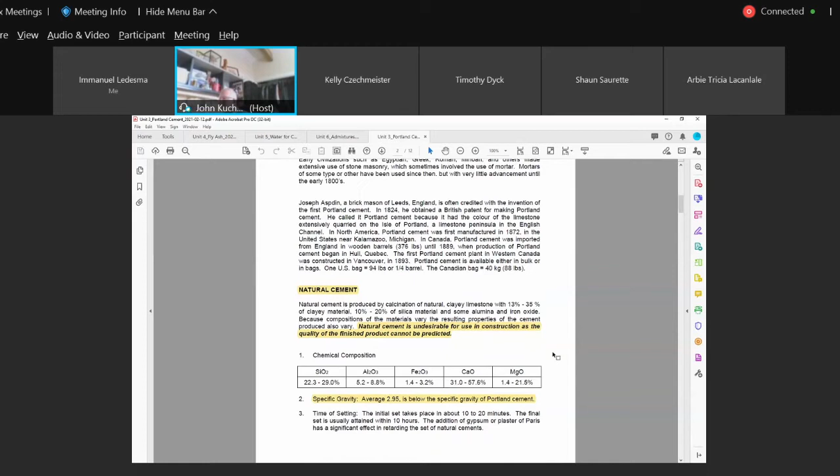It's unpredictable, okay? You can see the specific gravity of it is quite a bit less. We're at 3.15, it's about 2.95. The final set is usually attained within 10 hours. Ours can be around that also. We can start cutting concrete pavements with the GU cements anywhere between 5.5 to 6 hours, which means it's not final set, but it's setting up enough to support weight. But the initial setting time, 10 to 20 minutes, that's fast. You're going to lose your plasticity. You're going to lose your workability. So again, natural cements are not ideal.

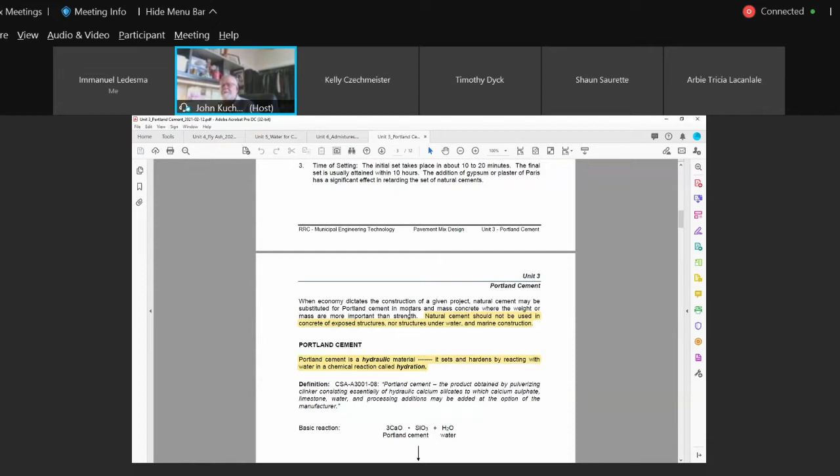Again, natural cement should not be used in structures exposed to water, marine environments; it's not as resistant to salt attack as our normal Portlands, because we can manufacture and change the composition of ingredients in various cements. That's why we're going to have 6 types of cement. In Canada, we have 6 various types. By changing raw materials, we can change the composition of the cement, make one more resistant to sulfate attack, make one with less heat of hydration, in other words, not producing as much heat.

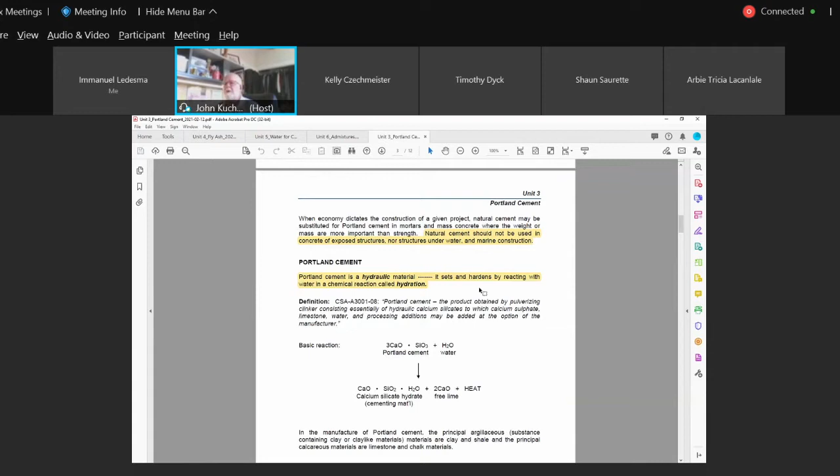Okay? Portland cement is hydraulic. What that means is it reacts with the water. And when it reacts with the water, we undergo a chemical reaction, and that chemical reaction is called hydration. Very common term on quizzes, very common term on exams. The chemical reaction between the cement and water is called hydration. That chemical reaction creates a hardening process. That's why concrete sets up. Here again is the chemical reaction of it. I don't quiz you on it.

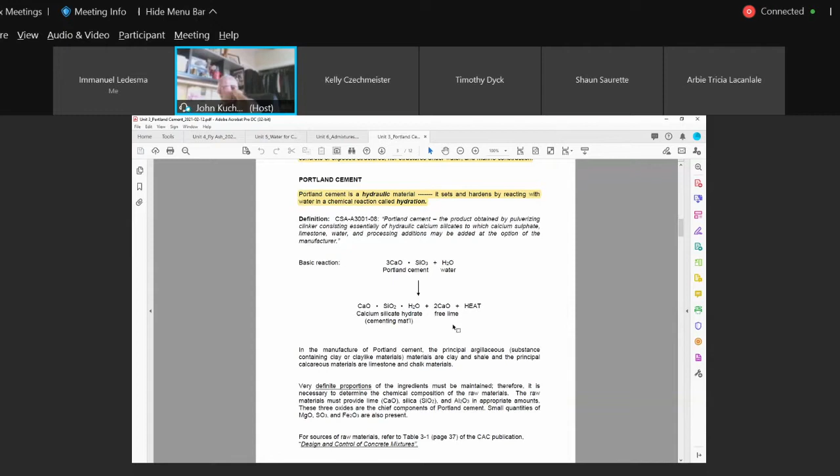I don't want to really know myself other than the basics. But my chemistry goes back to grade 12, so I might have forgotten a couple of things. Okay. Very definite proportions are maintained for the various types. So if we're going to make 6 different types of cement, we're going to change the proportions of the ingredients. Now, cement is manufactured from raw materials, so we have to find the raw materials that we need

to produce this design and control of concrete mixtures. If you guys are going to be working for some of the consultants, they may even have this in their library. This is the textbook that we would have been using this year. Chapter 9 came from an older version from the Portland Cement Association. We were using one that was donated by the Concrete Ready Mix. It's the 8th edition, the Canadian edition, by the Cement Association of Canada.

So in there, there's a real good unit on cement and manufacturing, raw materials, where to find them, and so forth. If you get a chance to get a copy of that manual, by all means, take a good look at it. Okay, we're going to look at the key. These are the natural cements and Portland cements. Again, this is just for your interest. I'm not going to quiz you on it, but it gives you the raw materials, basically where Portland cement gets them.

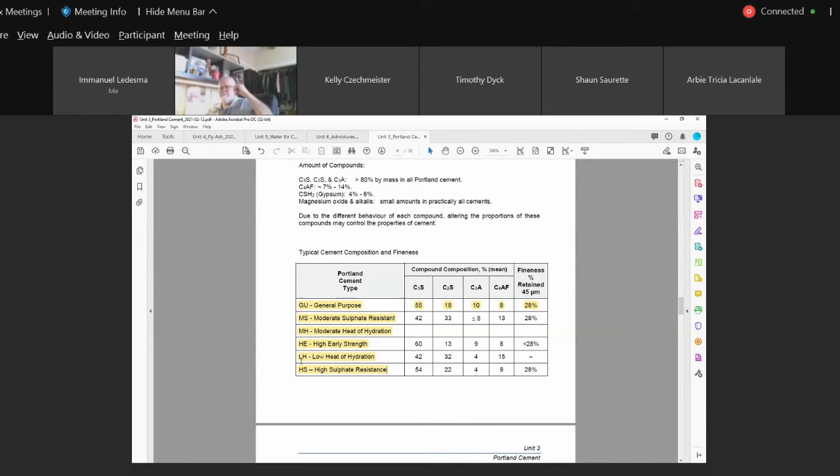GU, general purpose, is basically our Portland cements: anything above grade, pavement, slabs, anything above exposure to sulfates. You'll read in the City of Winnipeg where they talk about an early open pavement mix. They used to sometimes refer to it as a high early. They don't use high early cement. If you want to get a quicker strength, in other words, you're going to pour a slab downtown Winnipeg on a Friday and you want to open it Monday to traffic, you're going to use what they call a high early strength concrete mix.

And what they do there is they just use general Portland, GU, but they increase the cement content. So instead of, say, using 340, they may use 380 or 400 kilograms of cement. So they're making a stronger concrete mix, not because they need it for loading or capacity of cars. They just need it to get that 20 MPa quicker. They can open pavements in the City of Winnipeg if they get 20 MPa. So if it typically would take you a week to get 20 MPa, now they can get it in about 3 days. They just boost up the cement content.

Low heat of hydration is what you would probably use at the big hydro dams, where you have mass concrete, okay? Because the heat of hydration is what is generated from the hydration process. When cement and water come together in a chemical reaction, it's called hydration, and with that it generates heat. At one time there was a myth, and there still is with some contractors: oh, I don't have to heat concrete, it'll never freeze because it creates its own heat. Balderdash. Try and place concrete at -5 without any type of protection and see if it doesn't freeze. It'll freeze. Yes, there's heat generation, but not enough to prevent it from freezing.

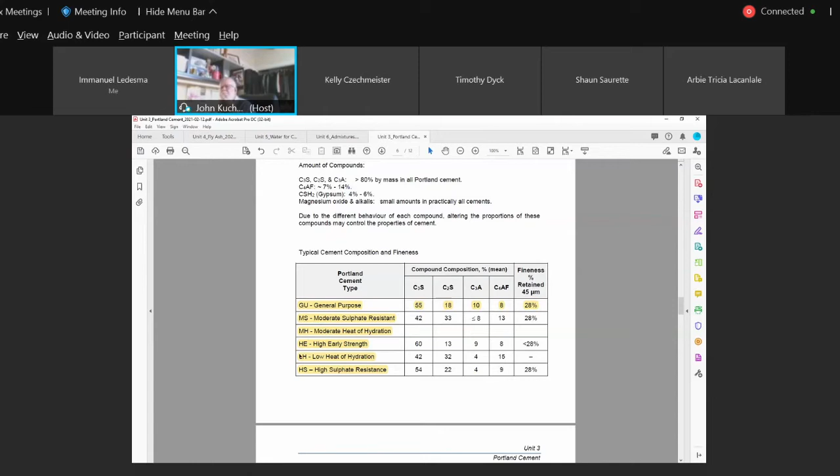Now, when you've got mass concrete, large sections, maybe a big pile cap, maybe a big housekeeping pad for a huge generator or a huge compressor, you may be looking at something that's 3 meters by 3 meters by 3 meters. The temperature inside the core of that element is huge. That's bigger than your room; the ceiling height is only 8 feet. So you can imagine the amount of heat buildup inside that big concrete pedestal or block, okay? So we've been able to produce various cements for our various environments. GU, MS, and so on, because remember these used to be type 10, type 20, type 30, type 40, type 50, okay?

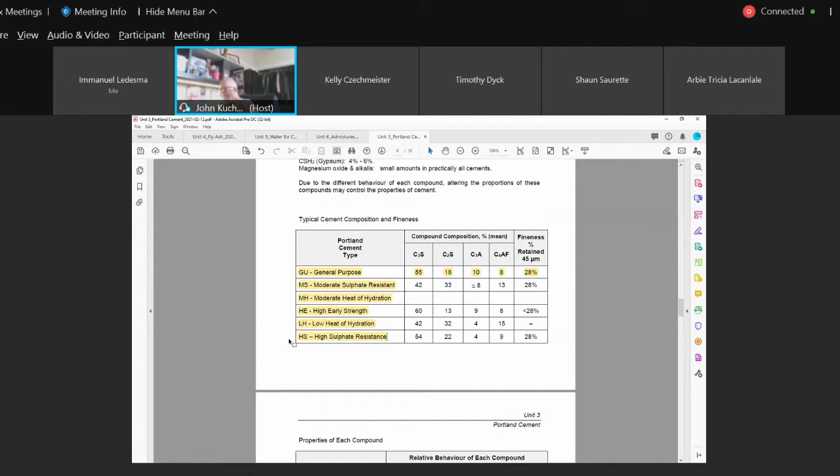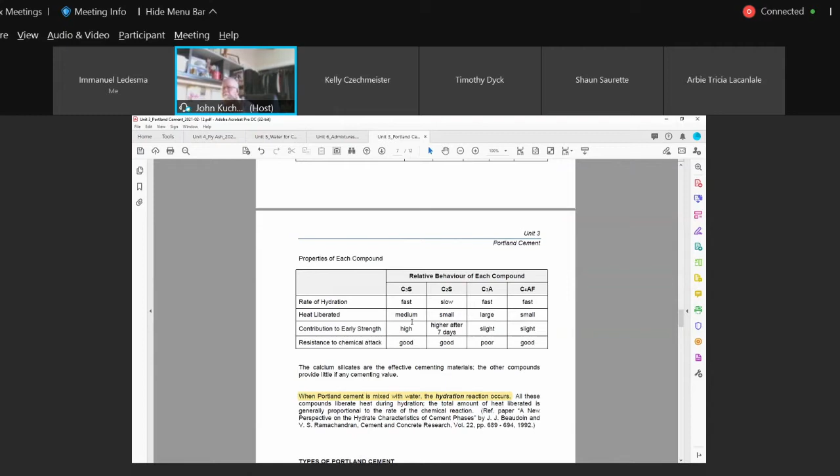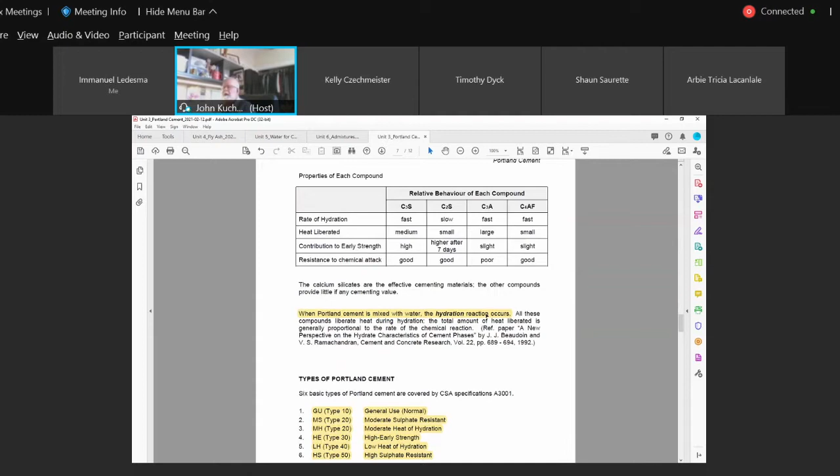You can see here which principal compound controls the various properties: C3S, C2S. Don't worry about it, you're not going to be quizzed on it, but those principal compounds all have a bearing on the physical development of that concrete or cement. When Portland cement is mixed with water, the hydration reaction occurs. So at the batch plant, when the aggregates and cement come together, even before the mixing water is added, there's probably enough water in the aggregates, especially if moisture contents are high. Hydration is going to start right from that point.

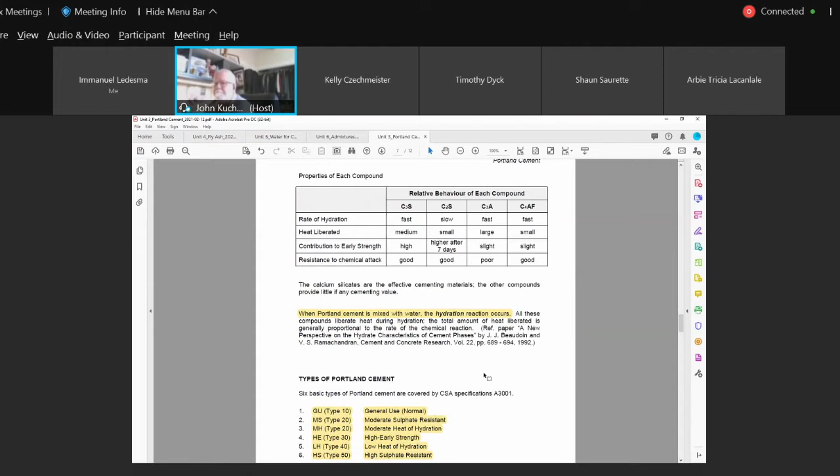Okay, here again are the types of Portland cement. In the States, type 1 was GU, type 2 was moderate heat of hydration and moderate sulfate resistance; they grouped it together. Type 3 was their high early. Type 4 was their low heat of hydration. And type 5 was their high sulfate resistance. But don't worry about the US. We're in Canada here, so these are the ones we're interested in. Okay?

I'm not going to go through these in great detail for a simple reason. It gives you an idea. Typically GU for pavements, anything above grade, floors, reinforced concrete buildings; HS, high sulfate, for areas that have high sulfate concentrations. Okay?

The HS will usually have lower strengths than GU at the earlier age, but at 28 days, shouldn't have a problem. So typically on a GU cement, within 7 days, you should get 70 to 75% of your 28-day design strength. Whereas if you're using HS, high sulfates, typically you might only get 65 to 67%. So it gives you an indication.

Don't panic if your HS cements are typically lower than what you're used to with pavement. It's because of the composition. When you work with concrete and you understand the basics, you can understand it. And why do we make 7-day cylinder strengths? Why do we test concrete at 7 days? Anybody? Or at 3 days?

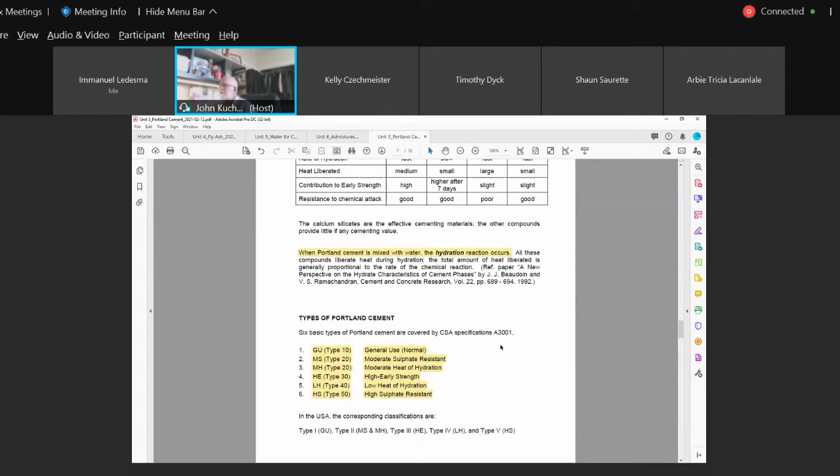We'll switch to mixing water, which is very, very brief, so we'll get that out of the way. Now we can go longer with this. I've allowed 2 hours and 15 minutes. I don't know what you guys are on. If you want to go longer with these lectures, I don't have a problem with it. However, you guys already have different commitments and different schedules, so I realize that.

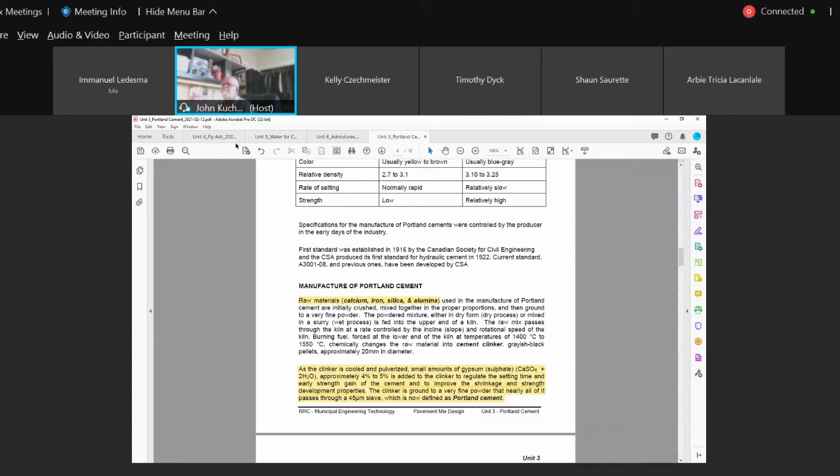Okay, so let's switch to mixing water here. I'm going to unit 5. Okay, this is fairly straightforward. What water do you use for mixing? If you can drink it and you don't die from it, it's good for concrete. So in other words, potable water, the water that comes right out of your tap, that's ideal. You know it's going to be okay because it's been tested, and the ingredients determined from a chemical analysis of the water are not detrimental to concrete, as long as those levels are within a certain range. But typically, potable water is the ideal water for mixing concrete.

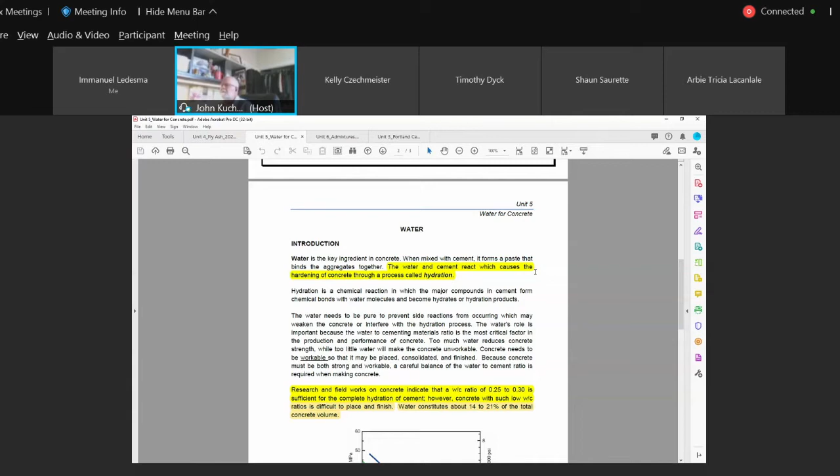It's the key ingredient in concrete. Without it, you can't have concrete. So you've got to have water to kick over the cement in a chemical reaction. The water and cement react, which causes the hardening of concrete, hydration. The water needs to be pure to prevent side reactions from occurring, which may weaken the concrete or interfere with the hydration process. Okay, this is key. We know potable drinking water works.

Now, if you're going to be working with concrete in a remote environment, say up north somewhere, and you're going to be using water out of a lake, water out of a stream, whatever, what's in it? There could be ingredients in that water. Let's say it doesn't affect your strength, but it could affect durability, could affect finishing, could affect staining, could have adverse effects other than strength. So this is where a well-planned project comes into play.

If you guys are going to be working as contract coordinators and you're building a water treatment plant in a remote settlement, and the contractor says, I'm going to draw water from this lake, I'm going to have pumps set up in the lake, put it into my water tank, and from the water tank pump out X amount of water for the concrete I'm mixing. You know that ahead of time. Get that water sampled, because you're not going to get water results overnight. It's a little too late when he's ready to batch concrete and you haven't even tested your water.

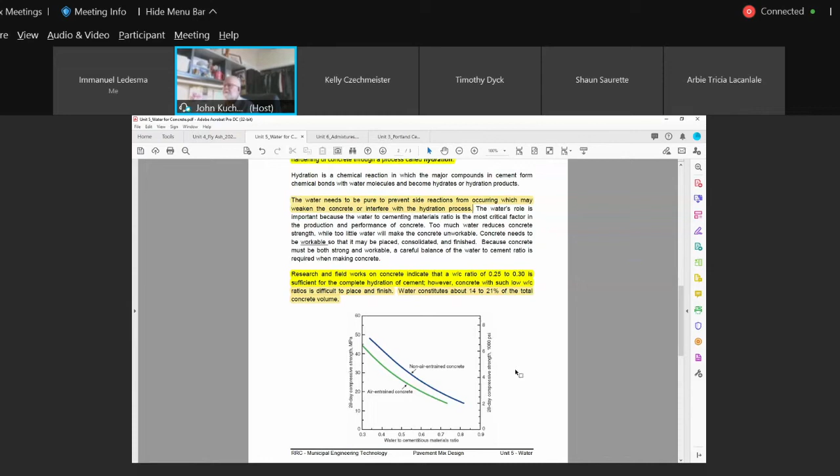Hint, okay? And here again, you can see, this is just a relationship between the water cement ratio and 28-day strength. Okay, you can see air entrained concrete and non-air entrained concrete. And right off the bat, you can see that at a certain water cement ratio, non-air entrained concrete gives you better strength.

But depending on, for the inside floor slab, okay, you don't need it for freeze thaw durability because there is none. But maybe you can't finish it as well. So even a lot of designers will use air entrained concrete for inside because of finishability. It's easier to finish air entrained concrete than non-air entrained concrete.

But here's the development. You can just see that as the water cement ratio increases, compressive strength decreases. So that's why we always use a lower water cementitious material ratio for strength development. The lower the water cement ratio, the higher your strength, okay? So here looks like a pretty good graph to figure out some relationships, okay? Like I gave you on the quiz. Learn how to read graphs. They're very important. That's why we graph them, okay?

Water quality. Almost any municipal water or any natural water that is drinkable with no pronounced taste or odor is satisfactory for mixing water. And there's certain criteria. When you test that water from a northern remote site, you're going to actually use the cement that you're going to be using, and you're going to make cubes with this water, and you're going to make cubes with standard control water, let's say water from your faucet. And the strength has to be a certain ratio between the water that's in question versus the standard cubes, okay?

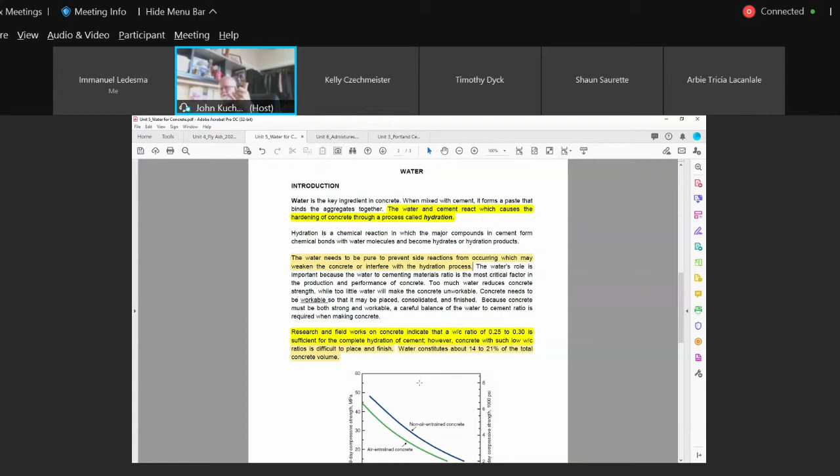So that's it for water. Know the importance of water and why we use it. Obviously, if you don't have water, you can't make concrete. And it will have an effect. It may affect setting time. It may have other adverse effects. Water for the hydration and for workability. Any questions on water?

Okay. But again, this is like anything else. When you're working as a contract coordinator, keep in mind that you have to look ahead. Some things that are requested, even something as simple as doing density testing. Many times the contractor fails to submit the sample for a standard Proctor test, okay? He doesn't do a standard Proctor test. So he calls for densities and he says, okay, give me % Proctor. Wow, where's your Proctor value? You never submitted it in.

You know, I've been at this for 48 years or so, and to this day, contractors still sometimes forget, same contractors that I've dealt with, different people, mind you. Well, I didn't send in a Proctor value. They don't understand the relationship between field densities and standard Proctor and whether you need 95% compaction or 98% compaction. Okay, so this is the difference between a good contract coordinator and one that isn't. Okay, any questions on water?

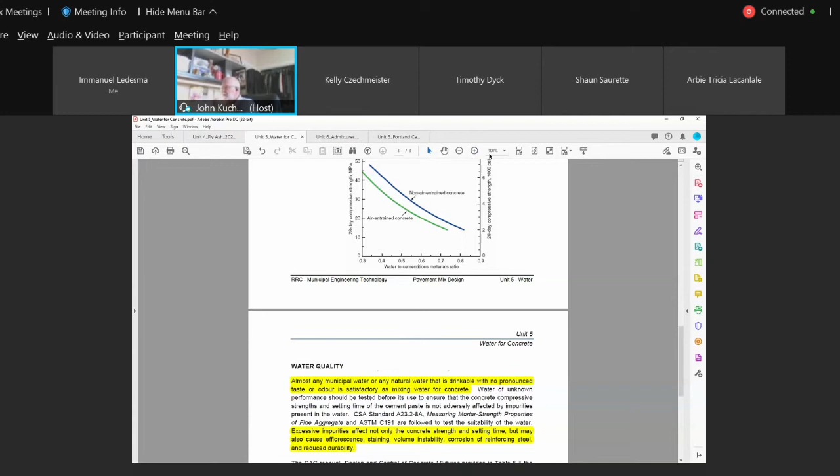Okay, anybody got their cup of coffee or their toast or whatever? Okay.

Okay, we're going to look into the lab. Now you're finishing off your lab 3, which is doing mix design for the aggregates that you supposedly tested, but we had the fictitious data. So remember, you're going to be using the specific gravity and the absorption data from your previous labs for your mix design, okay? Remember that it's based on dry basis, not SSD. When mix designs usually are submitted from the industry, they are usually proportioned on an SSD basis. That just means that it won't take on any water and there's no free water.

But when you're designing on a dry basis, you're taking into account the water being absorbed and the mixing water, minus the free water. So in other words, it's designed on a dry basis, but sometimes you can present the mix design values on an SSD basis, okay? We're doing dry basis, okay?

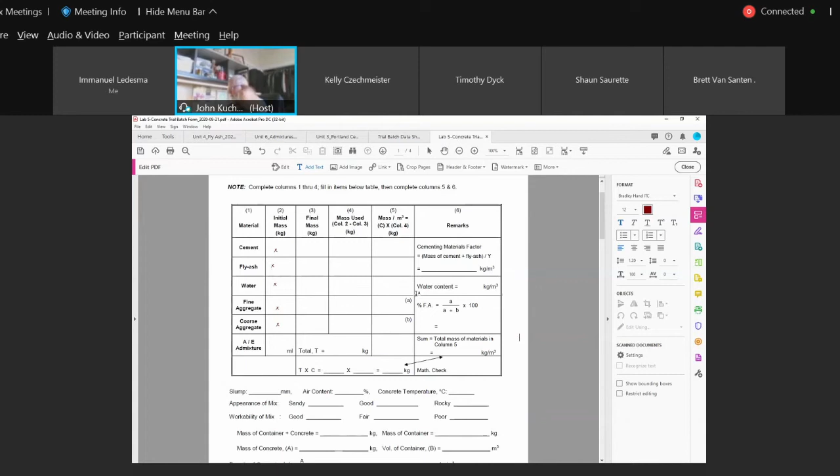Okay? Now, I'm going to pull up the example because it might be easier to read and understand it. So this is what we essentially do if we're doing a trial batch. And again, this was kind of formatted in a textbook. I think you may have even seen it in parts of Chapter 9, what I've uploaded for you. Different organizations may use it a little differently. And with it then, we'll have another page when we're actually physically testing the concrete. So let me just call up the other one here, and we'll go for the example.

Okay? I'll reduce that a bit. Everybody see that okay? Okay, here it is. We're batching 0.1 cubic meter. So it says that 0.1 cubic meter for this example, 53.5 kgs of cement. Okay? Now, you go through the calculations. This example doesn't have fly ash, okay? Because back then we weren't using fly ash. But it makes no difference really as to the calculations. It's just one less ingredient.

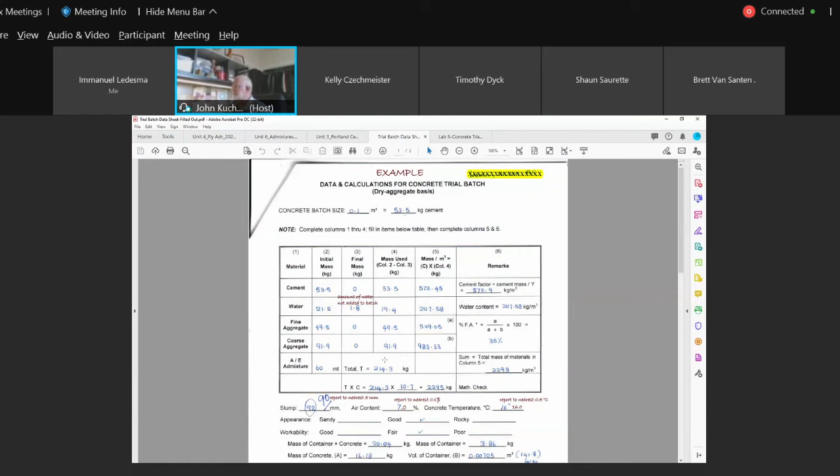Now, obviously there might have been a little bit of mass of the 60 milliliters, but it's so minor, you wouldn't account for it. It's a volume thing here. So it doesn't come into play for mass. It's just a certain amount. And we would actually just have that in a small graduated cylinder. 60 milliliters isn't a lot. Okay? So now,

you batch your concrete. Now you got to do some tests on it. Okay? And we're going to make cylinders. You're going to make flexural beams, specimens. But they did a slump test. And some of you may or may not really know what a slump test is. And we're going to cover that more when we get into the production of concrete and transport of concrete.

But slump, does anybody know what slump indicates? From a test point of view, what does a slump indicate when you do a slump test? Workability? And who mentioned workability? What is it? I want to get on my chats here. Okay, I see consistency, I see strength, consistency, consistency, strength, viscosity, consistency, workability. Those that have stated consistency, you're correct. Not workability.

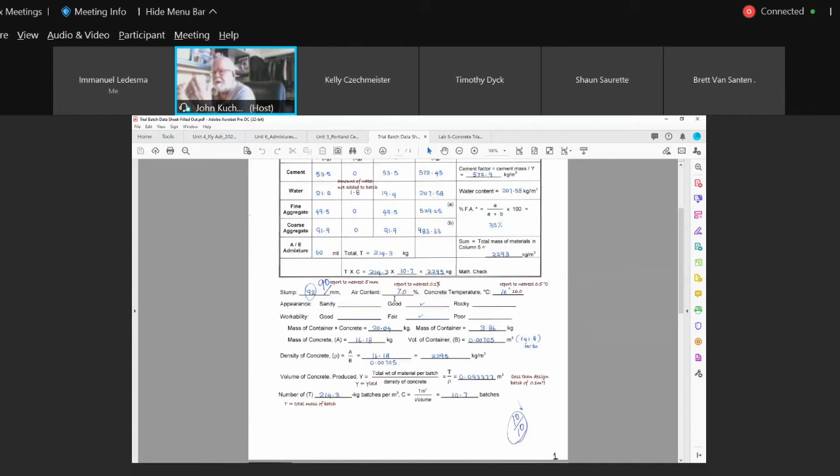So these are the tests that you would run, and then you would start making your cylinders and your beam specimens. These are the tests you typically would run when you're doing concrete testing in the field. PCL calls you out. They want a concrete test done on their pour. You go out there and you sample the concrete in accordance with CSA standards. You bring it over to where you're going to make your cylinders and leave them for the first 24 hours, and away you go.

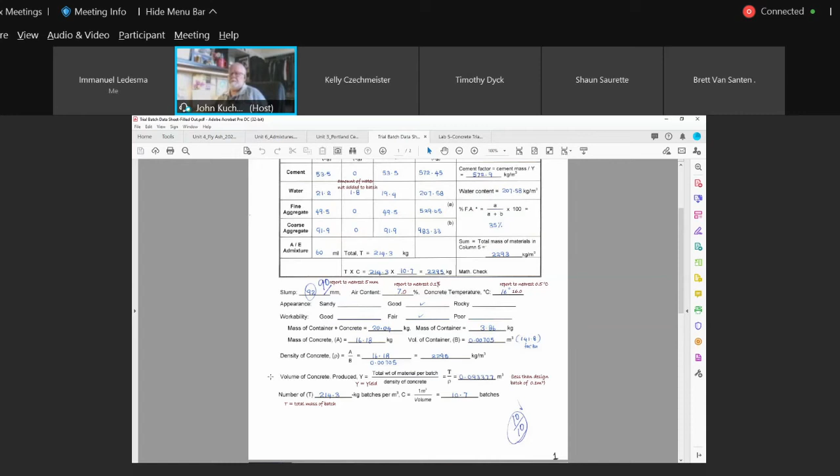So you take a temperature on it, you do a slump, you do an air, you do a density, then you're going to cast some cylinders. If it's PCL, obviously they're not into pavements. But let's say you were working for Transport Canada and they wanted flexural beams on their runways or aprons. So you would also cast flexural beam specimens. A23.2-8C is the procedure for casting flexural beams, and 9C is for compressive strength of concrete. There's a lot of information in it, and now you understand what the labs have to go through to be certified.

Anyhow, let's just go back. Let's say we've made our cylinders and our beams, but we want to go back and check everything. So this is the mass that we used. Now let's convert this mass back to a cubic meter basis, mass per cubic meter. So if you take C times column 4, these are the actual ingredients that you used on a cubic meter basis.

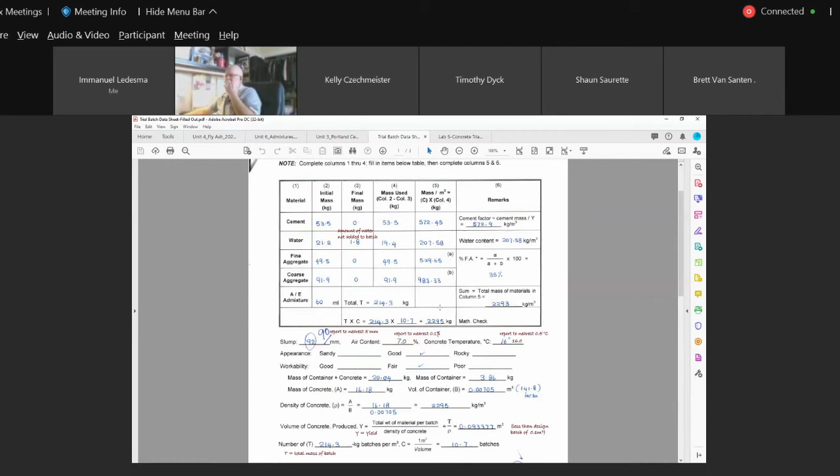If you total these, they get 2293. That's really close to 2295. This is a good check. If these are way out, there's something wrong. 2 kgs on a cubic meter is nothing. So in other words, they were able to confirm their density and their batch weights.

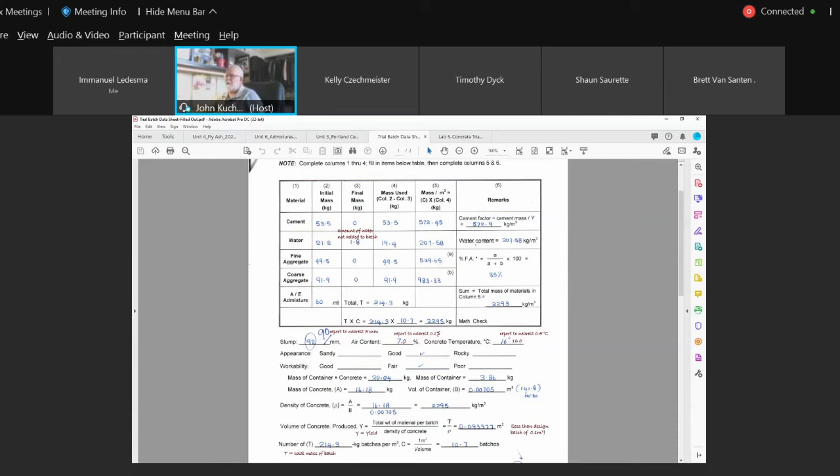So now your cement factor. Why did the cement factor here go up? Cement factor is the actual amount of cement you use. So for 1 cubic meter, 572.45 kgs of cement, because they used 53.5 for 0.1. Go through the calculations, 572.45. Why do they get 572.9? Why are they using more cement? Not much more, but they are. Why? Anybody? It tells you right there. Because you're not dividing by 0.1, you're dividing by 0.09.

So they're actually using more cement than required. But if the opposite was true, if you actually had 0.15 or 0.12, and you still have the same cement here, you're shortchanging. Okay, we need 541 kgs per cubic meter of cement for our mix design. Okay, if it worked out that we ended up having 540 or 539, which is minimal.

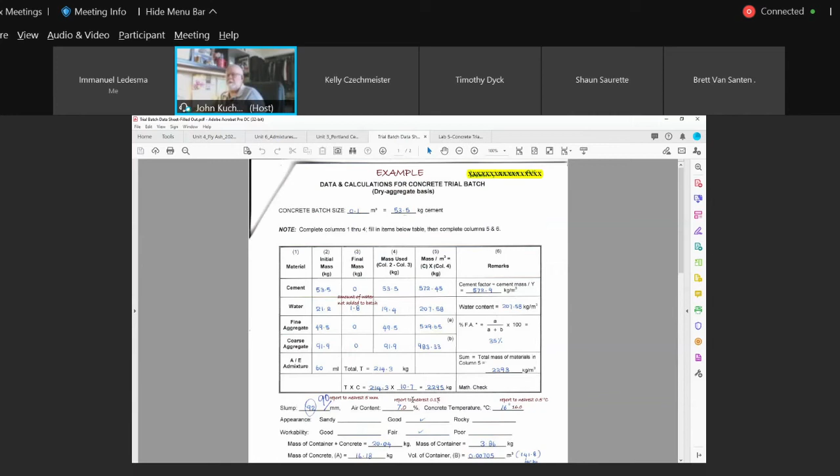However, the client might say, hey, you're shortchanging me. The spec says, your mix design says, a minimum of 541. You only gave me 540. I want a credit on the mix or whatever. See what I'm getting at? That's why yield is important. So if you're going to design for a little bit more than 1 cubic meter, you might go 1.03. Make sure that that cement is based on 1.03.

Okay, so here, that's why the cement factor. And that's what is referred to, cement factor, or cementitious factor. Cementitious would take into account having the fly ash as part of your cementing material, okay? Like I said, this example just doesn't have fly ash in it. So here you can see then that they're not shortchanging them on the cement, but the opposite could hold true.

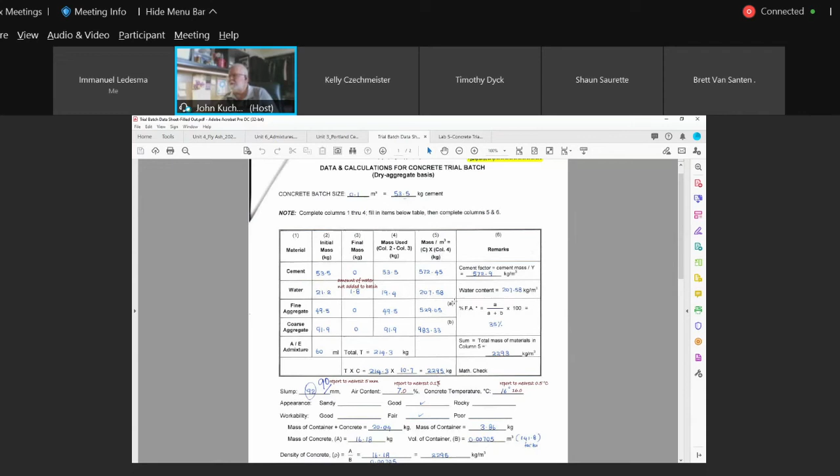So they go through and they figure out their water content. Okay? And here they're just doing a check of percent fine aggregate versus coarse aggregate. Okay? So I was pretty lenient on this. I gave them 10 out of 10 for this data. Okay? So this is actually what I want you to do now. Your mix design that you're going to submit today, Lab 3, go back and do it here.

Okay. Now what I'm going to do for the lab after that, for next week's lab, I'm going to give you some data. I'm going to give you a mass of container and concrete, and I'll give you mass of the container. Obviously, I'll give you either the volume or I'll give you the factor. Actually, no, I won't. I'll give you this, and I believe I already gave you these for the density of the concrete aggregate. So in other words, you're going to use the same bucket. I've got all that data information, so I should be able to give that to you.

So for next week, we're going to be actually calculating these, and then we're also going to witness through the video a compressive strength test and a flexural strength test. And I will then also give you some data. In other words, I will give you some data on a cylinder. When you're testing a concrete cylinder, what do you have to know to get the strength?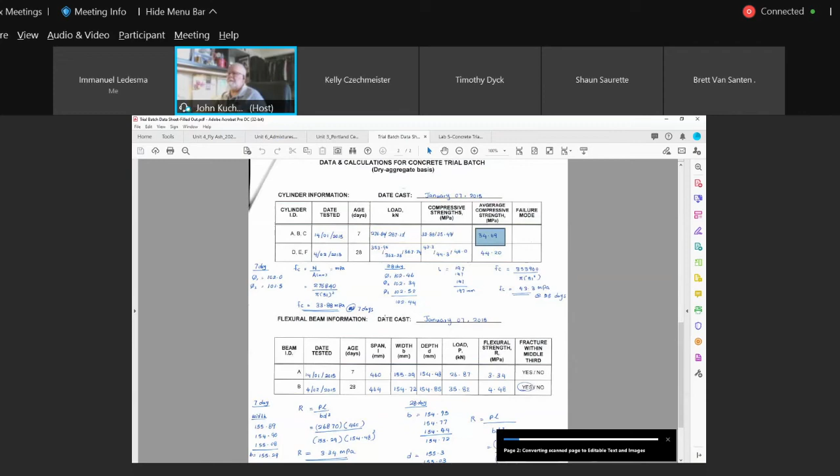Come on. But anyways, we'll come back to this a little later here. Let me just, come on, I'm freezing up here. Give me a minute here.

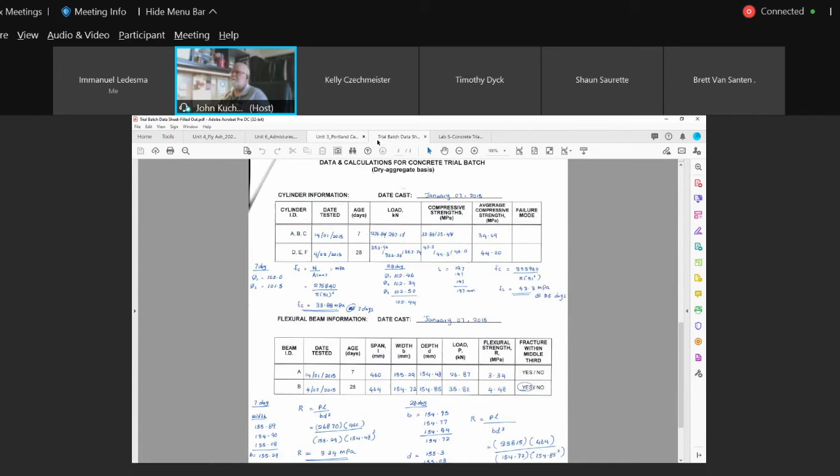So I want to go back to the blank form because I've remodeled this form since then a little bit. Okay, so it's going to be easier to read. Okay, I'm going to go back to the blank form here. And again, this is going to be next week. So for this lab, okay, I'm going to want you guys to calculate this and this. So I will get back to you. I have to get back to you with this mass here.

Okay, because everything else you should have. And as far as your slump, air content, and temperature, I'm going to leave that up to you. Put something in that's realistic. Don't copy exactly the same. You know, you're designing for 7%, but it just so happened that theirs worked up to 7%. Some other labs had 6.5. Okay, it all depends again on how much air entraining agent you use here.

You may want to use the middle. Your Darex air entraining technical data sheet is uploaded on Learn also. Read the technical data sheet. See what the manufacturer recommends as a dosage rate. You may want to go right down the middle. You may say, I'm going to go a little on the higher side of the average. I may go a little bit below the average. Okay, I want to see what you guys come up with here.

Okay, it's not important now. It's just because we're generating data. But this is the data you would physically determine. And I've had people use 60, and their air content was quite a bit lower. Maybe it didn't mix properly. Maybe the amount of water they used was different. Maybe the proportion between coarse and fine aggregate was different. They all had different mixes. Okay, keep that in mind.

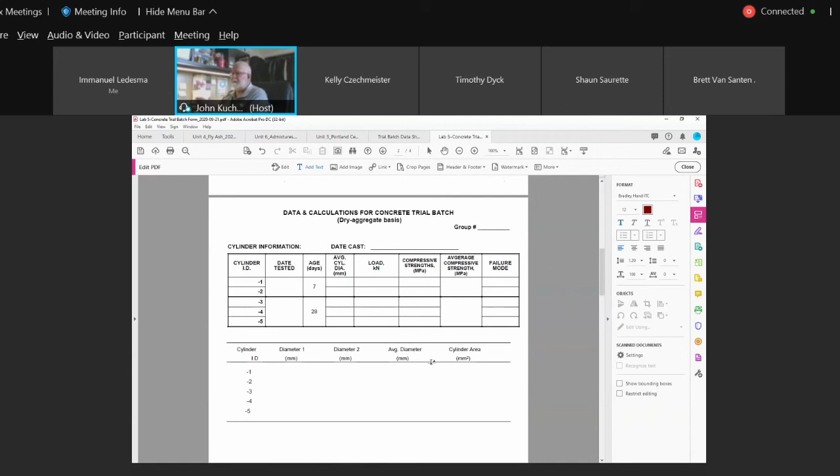Okay, and then here I just cleaned it up a little bit, so now you got room to record your diameter. So for cylinder number 1, you might say that that's going to be 1A1, 1A2, 1A3. If you're group 2A, you might call that 2A1, 2A2, 2A3, 2A4, 2A5. You would physically write that on the cylinder because you're storing it. So 28 days later, you want to come back and make sure you grab the right cylinders. So you have to catalog your cylinders. So here's the cylinder ID, whatever you call it, the 1A, 2A, whatever.

The date tested, well, if you made it today on the 9th, you would have been testing the 7-day on the 16th. And if you made it on the 9th, you'd be testing 7, 14, 21, 28 would be April 9th, give or take. So in other words, 28 days later than date cast. The average cylinder diameter, you're going to have diameter 1, 90 degrees to it, you're going to have diameter 2, your average diameter, the cylinder area. So I just cleaned this up a little bit, okay?

So next week's lab, you're going to be given some diameter data and a load. That's basically all you're going to need. From that, you should be able to calculate it. We'll get more into detail on this next week. Same with the beam now. Now, calculating a flexural beam is totally different than a cylinder because now you got span length. So look at those videos that I've uploaded for the flexural strength and the compressive strength. They're by CPATT.

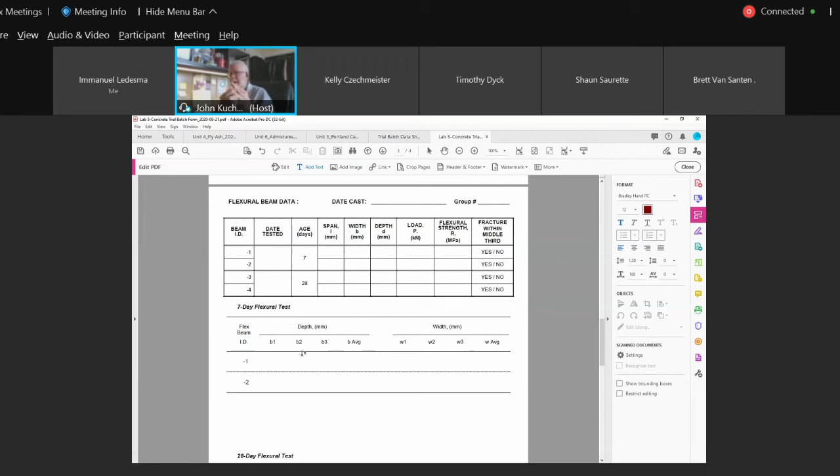Now we got to look at length, or the span length. We got to look at the width. We got to look at the depth, okay? Because now we're testing modulus of rupture, flexural strength. We'll get more into that next week. So for the lab next week, I want you guys to fill this out and go through the calculations, okay? Pretty straightforward.

And I will have to get you this mass of concrete quickly, okay? Any questions on this so far? Okay, sorry, Fabian, you had a question here. How do we know how much water is going to be used? In your circumstances here, use all your water.

For the most part, when we're actually batching this concrete, there was only one lab that I can recall, or maybe two labs, that had a little bit of water left over. Most of the people will use all their ingredients as weighed out, including the water. Okay. You've got to remember that these absorptions of the aggregates have been determined in previous labs by the students. The aggregates shouldn't be different because they come from the same bin, but there's also the degree of accuracy on those absorption rates.

You may determine an absorption of 2.0, okay? Maybe it's 2.2. So it absorbed more water than what you allowed for. So these absorptions, again, are based on tests. And a test is only as accurate as the people that are doing it and the standards that you're following. And then there's just the anomalies of the test itself, the degree of accuracy. So for the most part, most students use all the water. So for your analysis, use all your water. If your water works out to 55 grams, whatever, use it all. You can base it on that.

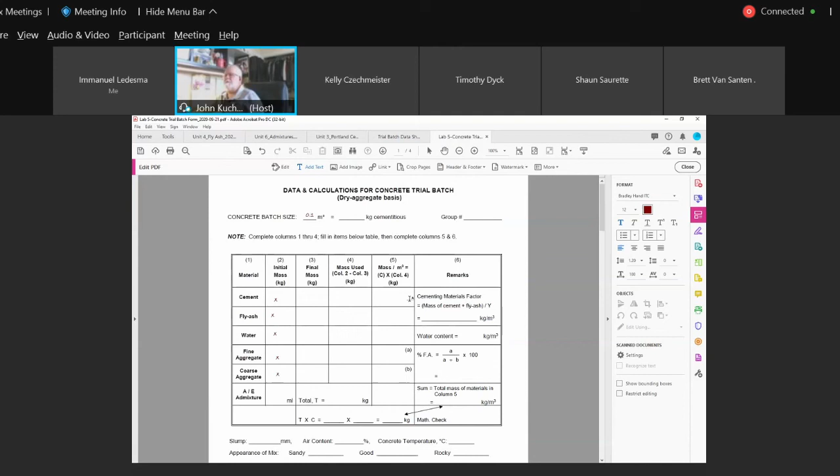Any questions? Now, this one here, I'm just looking to see if I really need it before the next lab. You're going to use it for next week's lab when you're actually calculating. Well, you'll have it anyways. Yeah, submit it. No letter required for this one. We're going to have a letter in the last lab. Just give me a brief statement or two saying that you've adjusted the batch proportions for a trial batch based on 0.1 cubic meters, and the data is attached. So there doesn't have to be much involved. Any questions? So give me this for next week. This shouldn't take you too long.

Go through the calculations. Like I said, come up with a legitimate slump, a legitimate air content, same with temperature. This here again, based on your proportions: 65-35, or if you're using 70-30, or whatever your proportions are, 62-38. Take a guess. Do you think the appearance would look good with that amount of cement? Or do you think it would look rocky? Keep in mind, we've got a heck of a lot of cement. We've got a lot of paste in our mix.

Conrad, you say you don't know. Well, you're designing this mix, right? What should your slump be? How else did you come up with your proportions? Remember, you went through lab 3 where you're doing concrete mix design, okay, by the absolute volume method. You got the City of Winnipeg spec. You know what the temperature should be. Yeah, you follow the City of Winnipeg spec.

So again, your slump was what? 70 plus or minus 20, I think? Is that what it said? I can't recall. Go halfway if you want. They went 90 millimeters. Air content, we're designing for 7. Okay, if you're designing for 7% air, what do you want it to be at? 7. I mean, if you want to put 7 in there, fine, but chances are, depending on what you use here, how much you're going to use there.

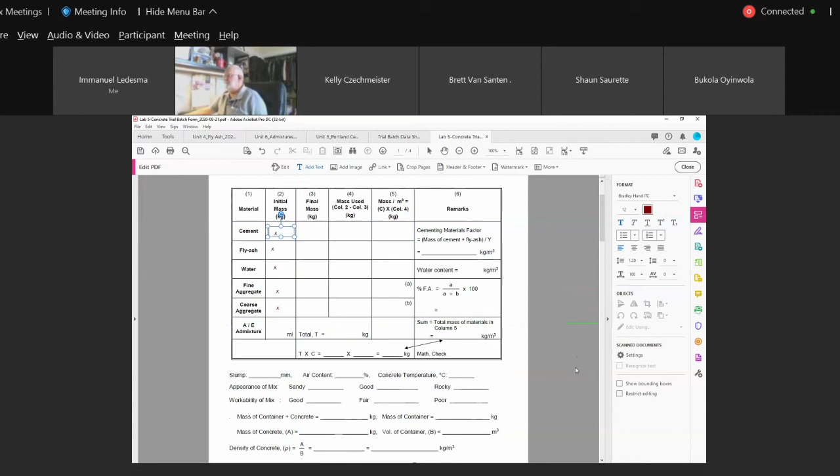Okay, what does it say here? Fabian, do you take the yield as 0.09 and mass of cement in column 5 for cement factor? Okay, I want you to go through that calculation. Okay, Fabian? I can answer that, but I won't. You have plenty of time now to check that example and see how they determined the 572.9, okay?

I see some comments here already. Good, talk to one another, guys. That's good. How do you calculate that? Well, that's for you guys to find out, okay? I can give you these answers, but you're not going to benefit anything from it. It'll be quite obvious, I think, once you go through these calculations.

Which is your number of batches? Number C. Okay? Total T is a batch mass, right? And how many of these batches of this weight do you need to make up a cubic meter? That's what it means. Remember in that example, let me just go back to that example here. 214.3 kilograms. That's a batch mass, right? Number of 214.3 kilogram batches per 1 cubic meter.

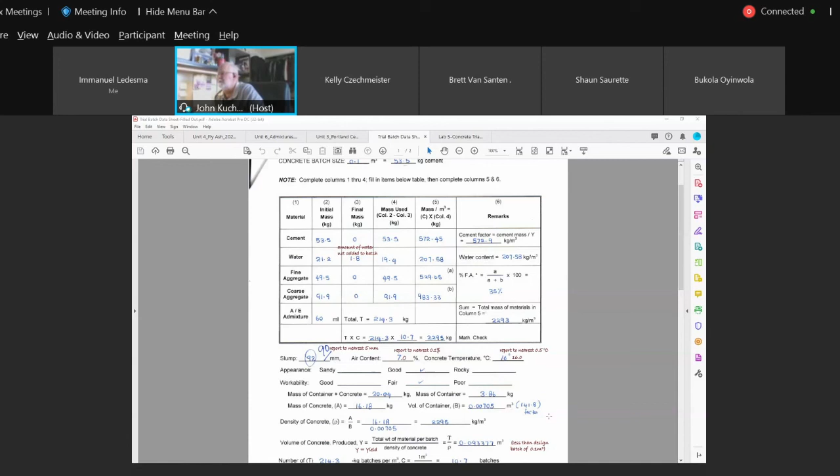Because remember, when you guys graduate, you're going to be in the workforce. Some of you may be closing a tender. And if a tender closes at 4 p.m., it closes at 4 p.m., not 4:01, not 4:02. Has anybody here ever closed a tender and had to submit a tender based on time? Anybody? Okay. Yes. So you know how strict it is.

What happens, Kelly, if the tender closes at 4 p.m. and you drop it off at 4:02? It's not valid. You don't accept it, right? Nope. Nope.

You know what? I don't know if I mentioned this earlier, but when I was working for the concrete restoration contractor, we would always send 2 guys to deliver a tender, especially to the City of Winnipeg. You pull up at City of Winnipeg and there's no place to park. So you jump out with the tender, the guy circles the block, and you run up the stairs to deliver the tender. And our clocks in our office and our wristwatches were set to the City of Winnipeg clock at the tender desk.

Because even though their clock could be 5 minutes faster than the actual time, and you could be set to the actual time, their time governs. So if you deliver it at 4:02 and you look at your watch and say, oh, I still got 3 minutes, and it's 4:02 on their clock and actually 3 minutes to 4 on yours, which is the correct time, tough apples. Their clock governs. It's 4:02, it's late, they don't even open it. They'll just hand it back to you and say, not accepted.